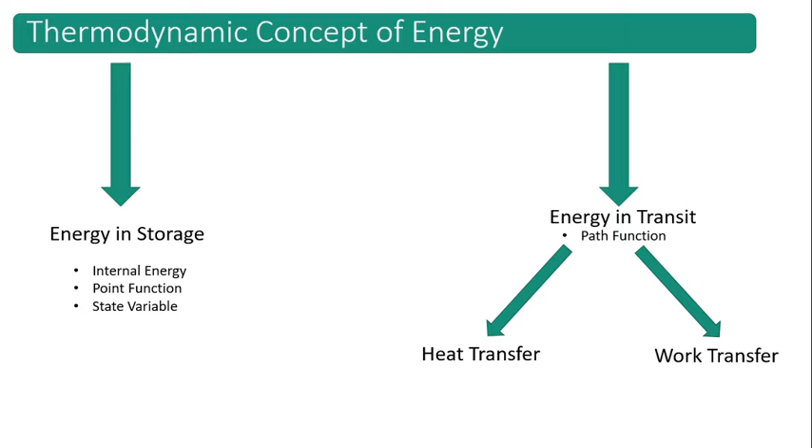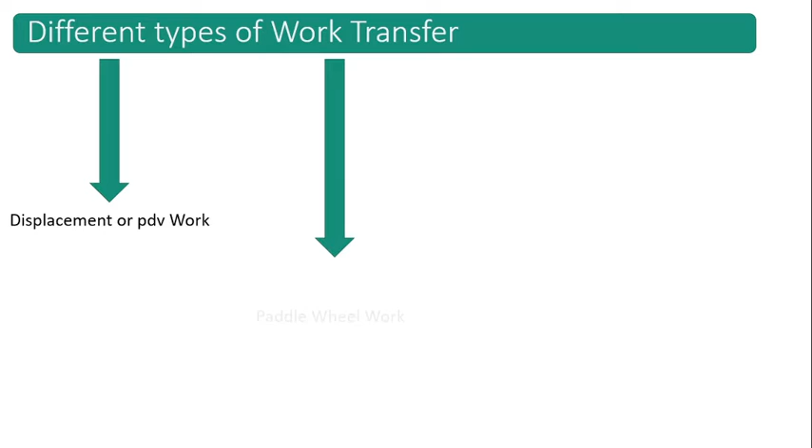Heat transfer means the kind of energy in transit by virtue of temperature difference, and it flows in the direction of the negative temperature gradient, meaning from high temperature to low temperature. And all other forms of energy transfer are work transfer. So the various types of work transfer in thermodynamics are displacement or PdV work, paddle wheel work, flow work, and shaft work.

Displacement work means work done by the displacement of the system boundary. This is associated with the closed system, and there is no restriction whether its volume will be fixed or not. The system boundary can either expand or collapse. Because of the displacement of the system boundary containing a fixed mass, the work transfer which takes place with its surroundings is the displacement work.

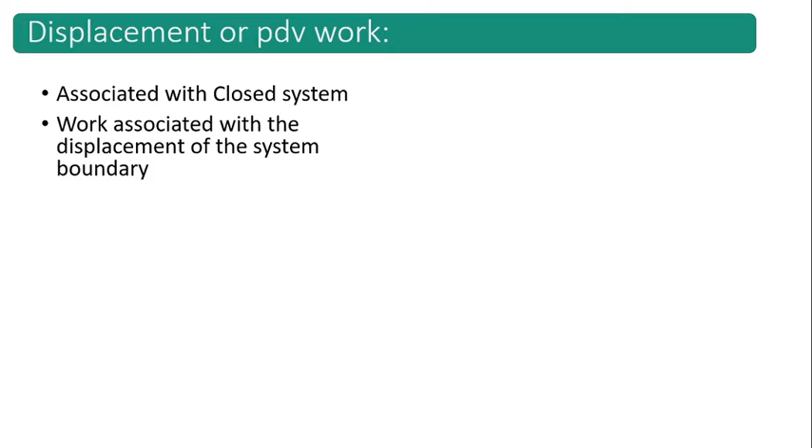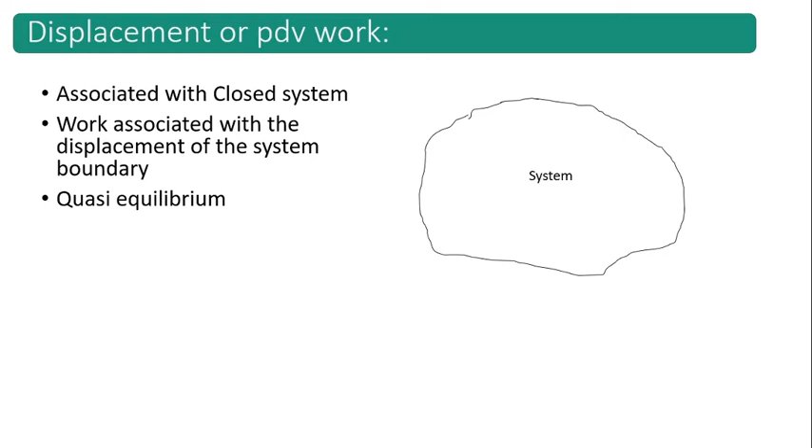But there is a specific theme in between. The displacement work specifically implies the work due to the displacement of the system boundary in a quasi-equilibrium process. That means the system has to expand or collapse slowly through infinite equilibrium states. So if we consider this as a system, P is the internal pressure of the system and Pex we can consider as the external pressure to the system.

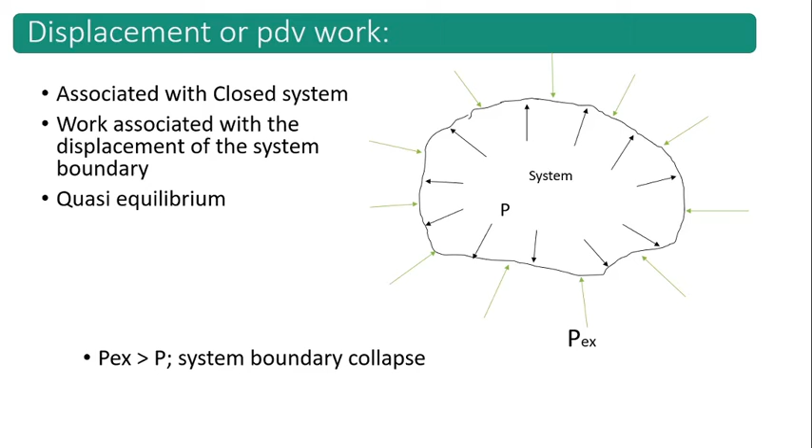So from the figure it is clear that if Pex, the external pressure, is greater than P, the internal pressure of the system, then the system boundary will collapse. And if P is greater than Pex, that is the internal pressure of the system is more than the external pressure, the system boundary will expand.

So during the expansion and collapse, we can say that the system boundary will move, or the displacement of the system boundary will take place, and due to which there will be work done, that is displacement work.

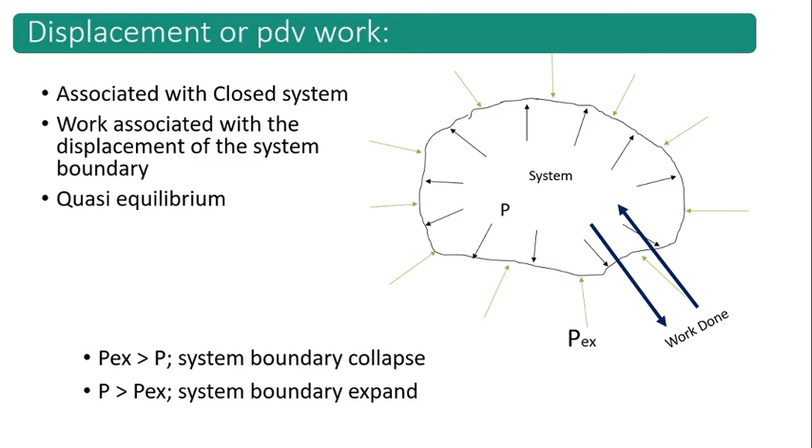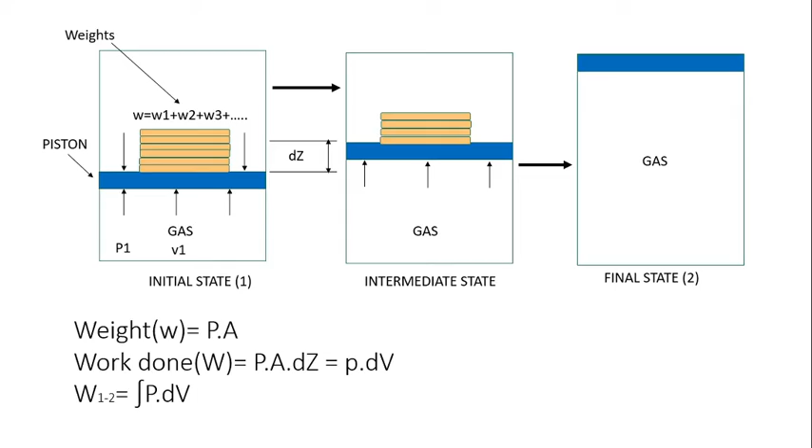So the work done can be said to be W equals P into A into dz. It is clear in the picture that dz is nothing but the displacement of the piston due to the removal of weight. So the work done is P into A into dz, which is P into dV, that is the pressure into displacement volume. So the entire work done from the initial state to the final state is W12, and that is the integration of PdV. Next is paddle wheel work.

If m is the mass of the weight lowered through a distance dz and T is the torque transmitted by the shaft in rotating through an angle d theta, the differential work transfer to the fluid is given by dW equals mg dz, which equals T d theta. And then the total work transfer is W equals integration from 1 to 2 of mg dz, which is integration of T d theta.

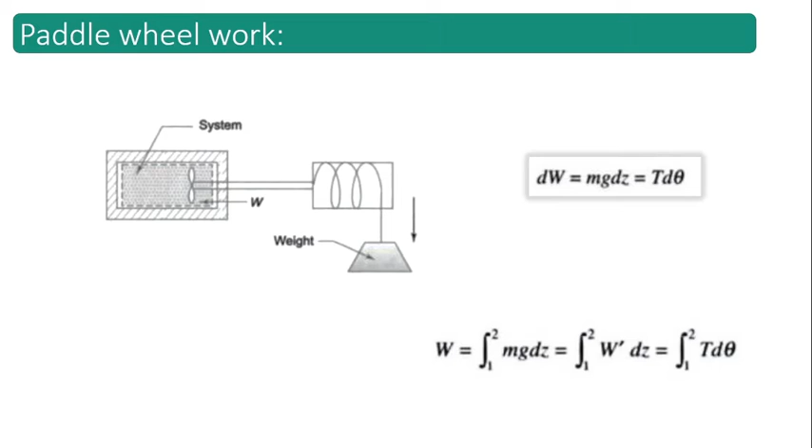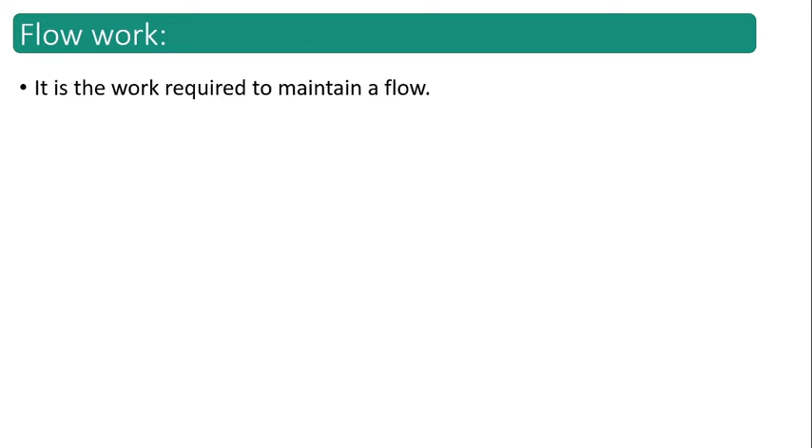Now we come to the flow work. The flow work is significant only in a flow process or an open system. It represents the energy transferred across the system boundary as a result of the energy imparted to the fluid by a pump, blower or compressor to make the fluid flow across the control volume. So it is basically the work required to maintain the continuous flow, and it is associated with the control volume.

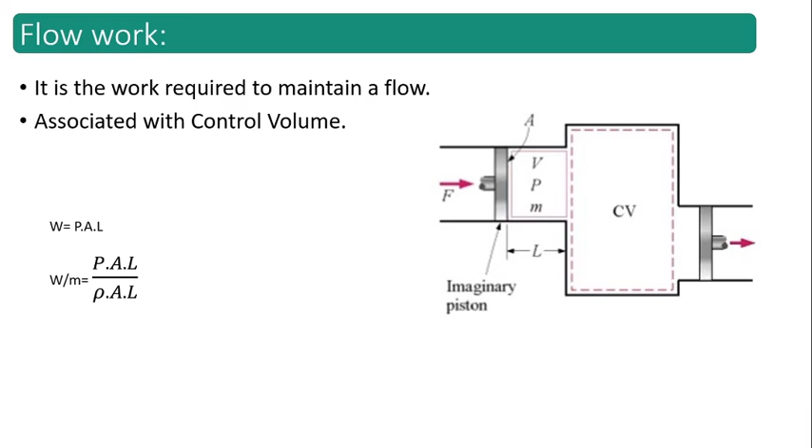So the work done equals pressure into area into the displacement length L. And in case of flow work we mention this as work done per unit mass of fluid. So we have written W by M, work done per unit mass of fluid, which equals PAL by rho AL, where rho is the density of the fluid. After cancelling out area and length we get P by rho, which is termed P into small v. Here small v is the specific volume of the particular fluid.

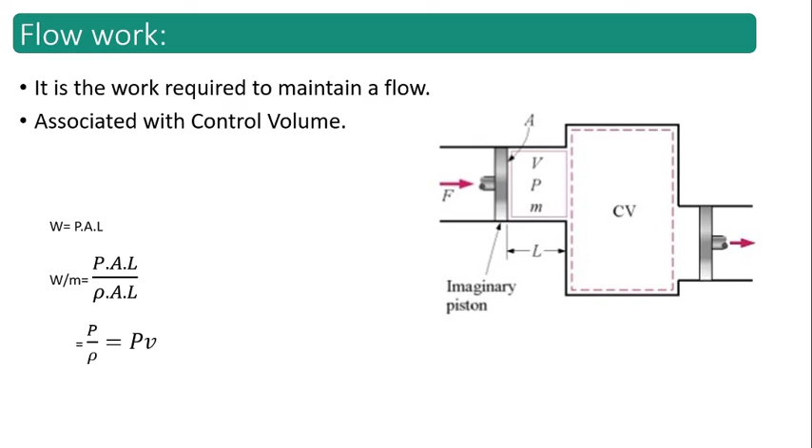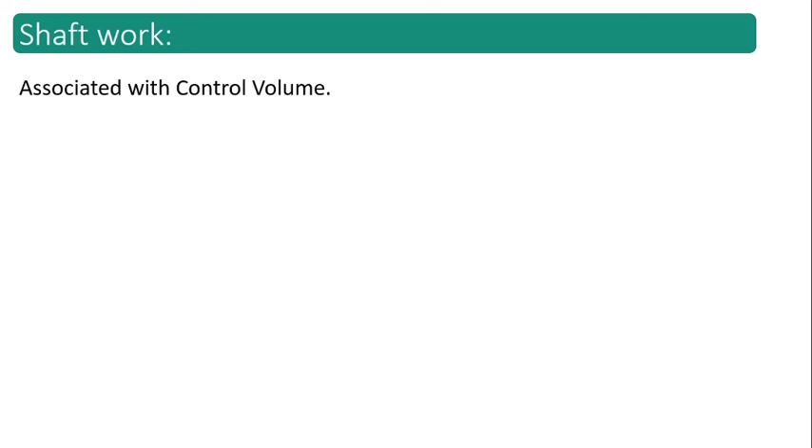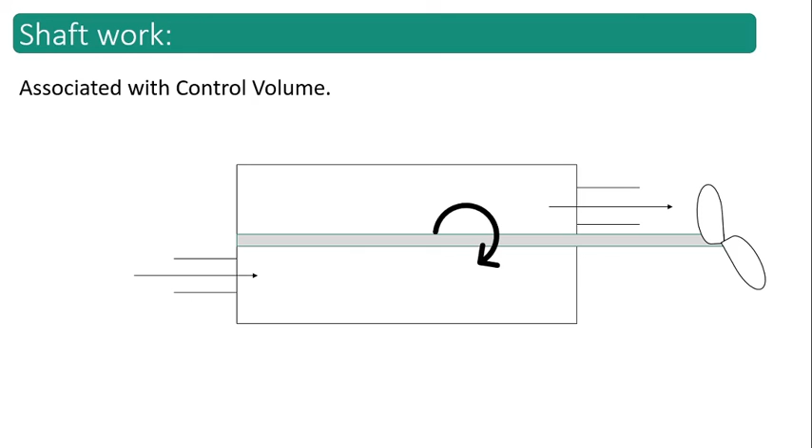And also the shaft power is T d theta by d tau, which equals T omega, where omega is the angular velocity and T is considered constant in this case.